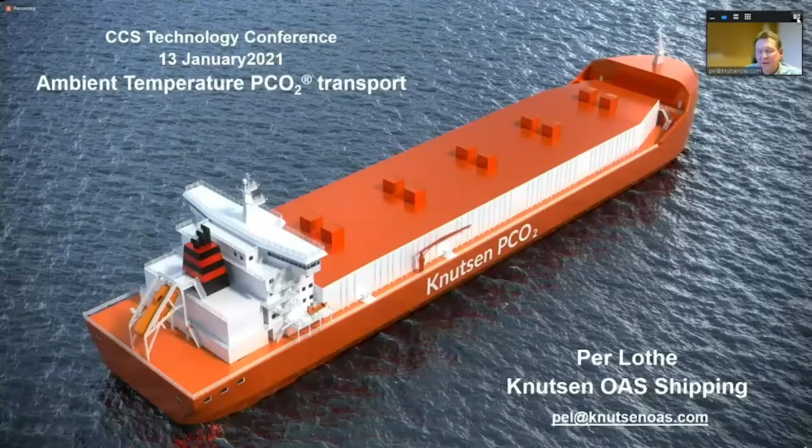So my name is Per Lothe. I'm working for Knutsen OAS Shipping, and we have been working on transport of oil and gas, and now we are also looking very much into the CO2 transport. I think this will be a very interesting thing for the next decades to come. And one of the reasons, I believe, is that the CO2 transport is an emerging market. It's heating up, and a service company like ourselves are consolidating the services, that's for sure.

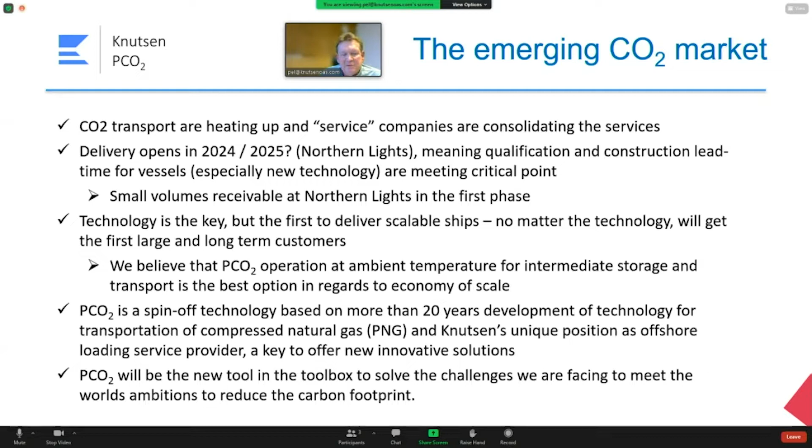And we have the Northern Lights that's just been presented. That is maybe the opening of the market, meaning that qualification and construction lead time for vessels, that's happening now, and we are in a critical point. So small volumes in Northern Lights, I think they have also ambitions to increase the volumes in the future. And this is also one area where we are really looking into. And we also think the technology is the key.

Those first able to deliver scalable ships, no matter technology, will get the first large and long-term customers, because the volumes are quite enormous in the future. And we believe our technology, we call it PCO2, that operates at ambient temperature for intermediate storage and transport, is one of the best options regarding economy of scale. So I'll come back to that.

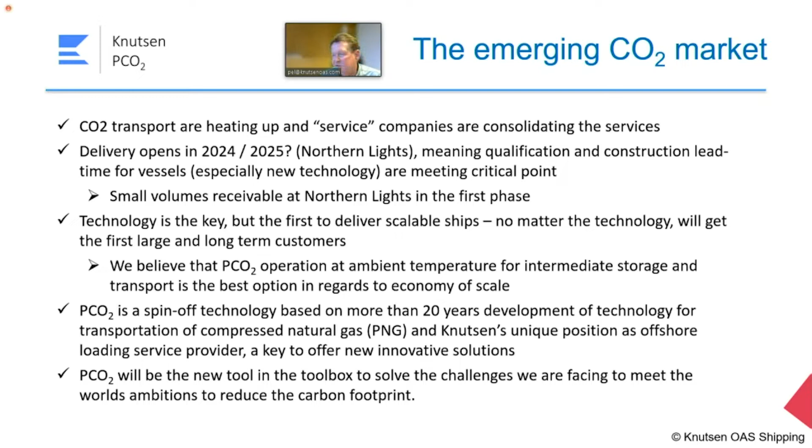This technology we have developed is a spin-off of more than 20 years of work we have done in the company. We started out to transport gas at high pressure, and Knutsen's unique position in offshore loading as a service provider is one of the keys, I think, to a new innovative solution for the future. And this is what we are using now when we are developing this technology. And we also believe that PCO2 can be a new tool in the toolbox to solve challenges we are facing to meet the world's ambitions to reduce the carbon footprint.

And looking at the volumes, that's enormous. Just looking at the EU in 2021, the emission was about 1,500 million tons a year. If we say that the ambition is to reduce it by 50% in 2030, still 750 million tons. And if you're talking about 10%, maybe with CCS, we still are on 75 million tons. And half of that is with shipping. It's quite a big volume.

And as you probably know, there are 3 alternatives to ship CO2. It's the low pressure that was also mentioned by the last speaker. But we have also the medium pressure that is selected for the Northern Lights, and then we have this higher pressure that we are actually promoting, and that's because we would like to transport it above 0 degrees.

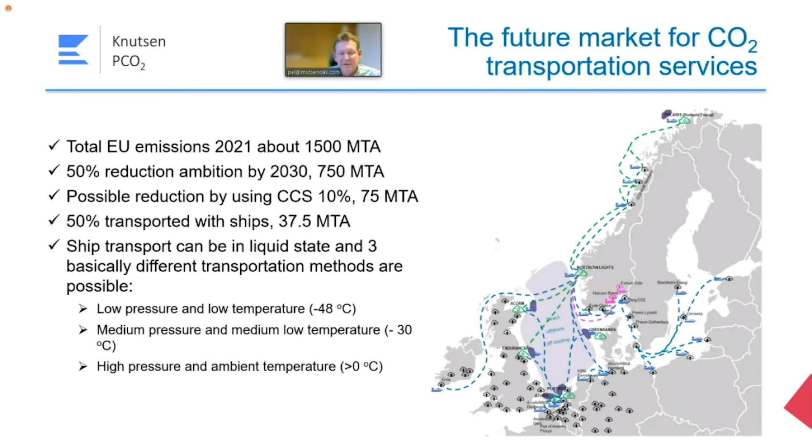This 20-year development is something that we have been working very much on, and we have used this period to actually go into different kinds of transport. So we started with the transport of CNG or gas, and this has developed into other products like CO2 at ambient temperature. And the technology we have is based on well-known technology elements.

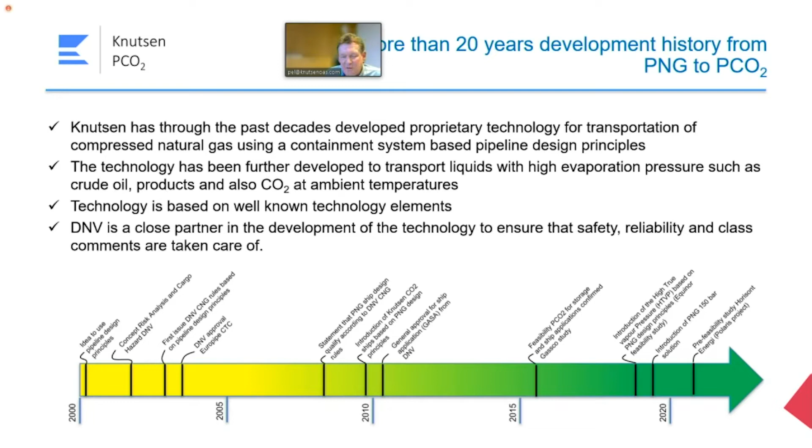The tank system is actually to use pipeline design principles. We believe that's the best known and explored cylindrical design available for storing things in pressure. The cargo tank cylinders, we call it, is where the CO2 is stored, consists of vertical stacked pipe sections, and we have a connection in top and bottom for the liquid and gas handling.

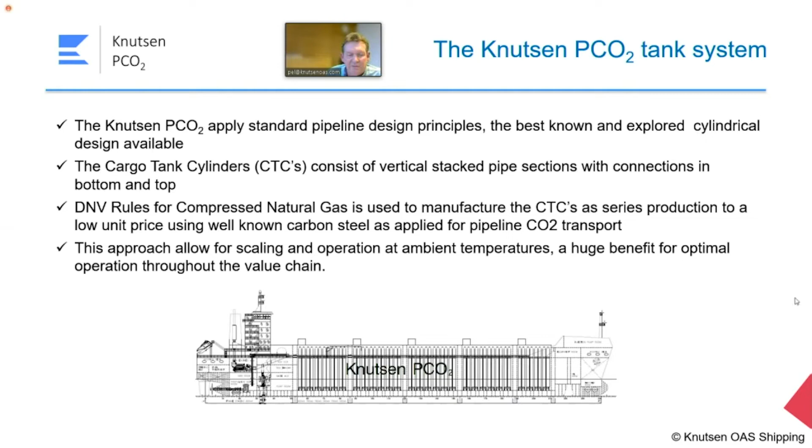We use the DNV rules for compressed natural gas that we are very familiar with. And we also have a good dialogue with the DNV on how we also implement this into a CO2 ship. And the approach allows for scaling operation at ambient temperature, which we believe is a huge benefit for optimal transport operation throughout the value chain. This is how it looked like. The cylinders are stacked into the ship in the cassettes.

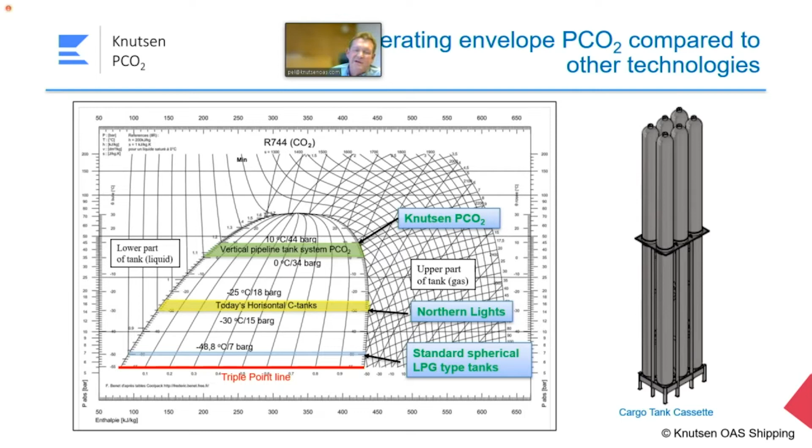This is illustrating where we are compared to other types of transportation, where you have the spherical LPG tanks close to the triple point line. Then we have the Northern Lights, which is about 15, 18 bar. And our system that is between 34 to 44 bar. And this is where we think it's a very interesting alternative, because we are, as we said, offshore operator. And if we are going offshore, this can then be directly injected into a reservoir. I will come back to that as well.

Also for scalability, that's important, because with these pipes, it's the number of pipes and the length, height of pipe we really are talking about. And if you look at this one, the existing CO2 ships are quite small. Northern Lights is maybe the next step. And we believe that in order to be able to transport the big volumes we see in the future, we need to have bigger ships. So we need to get where we have this green PCO2, where we can actually increase the volumes.

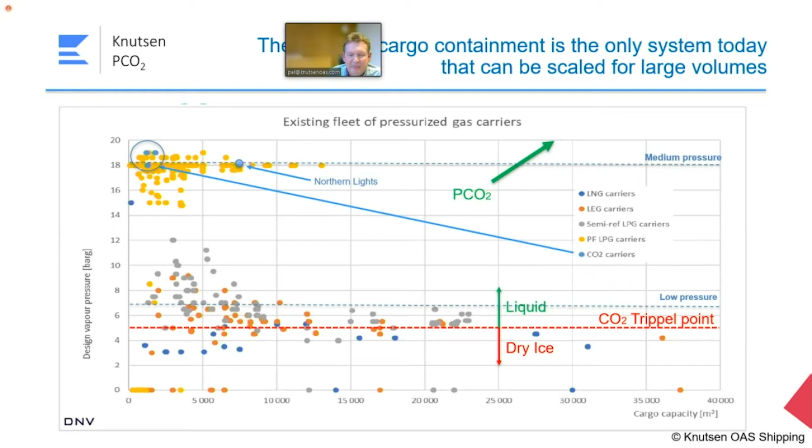If you look at this one, this is how we think about this. Now we are doing this project, a Polaris project, where we are actually considering a 16,000 ton ship at ambient temperature. So I think this is an interesting thing, and we have done design for ships up to 30,000-40,000, by actually increasing the number of cylinders.

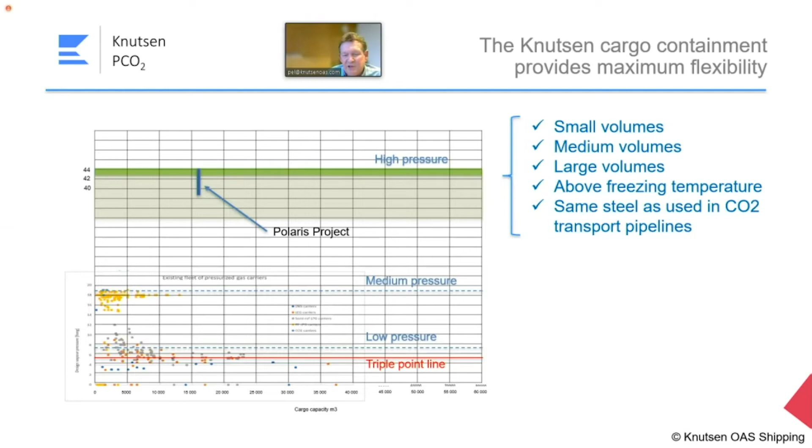We are supported by the world's largest pipeline supplier, EUROPIPE. We have been working with them for at least 20 years now, and they have supported us very much in this process. During the development of the gas system, we have approval of the containment system, and all these approvals are then the basis for what we are now doing on the transport of CO2. So we have done all that is required to qualify this containment system. It's been a lot of work, and I hope we can also use this very interesting technology for CO2 transport.

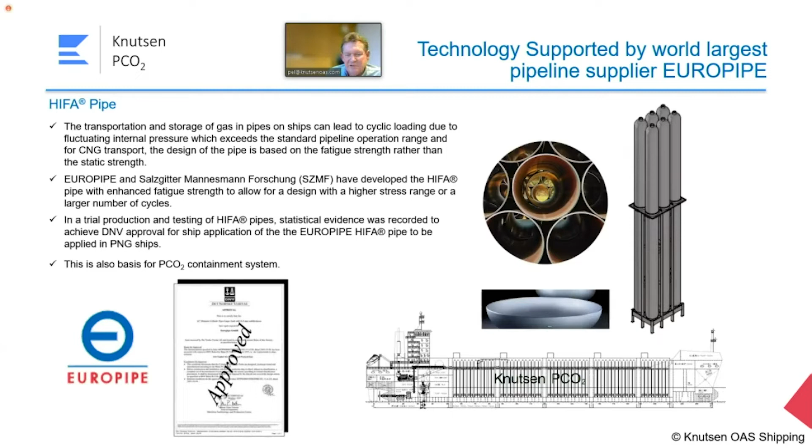This is the Barents Blue Polaris project, where we have been working with Horisont Energy for the last year. Of course, this is a very, very challenging project. They are looking at going directly offshore, injecting it to the reservoir from this plant onshore. We have done design of the ship now in the pre-FEED study, and we are now hopefully going to the next phase of this project. And you see, this is offshore. It's the Barents Sea, so it's quite a challenging environmental area. So this is also important.

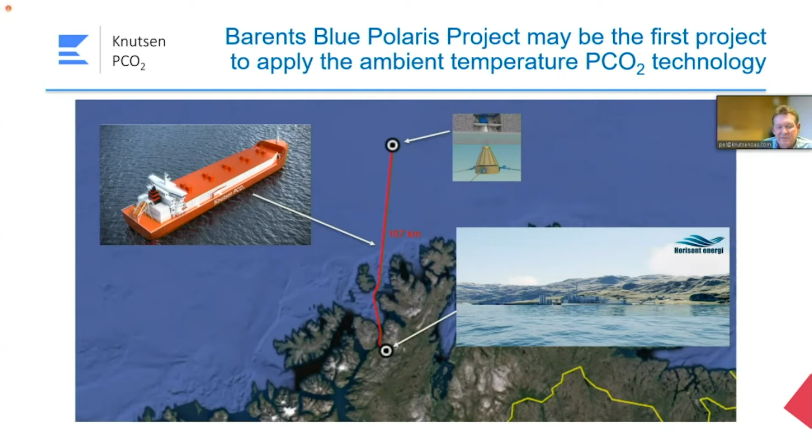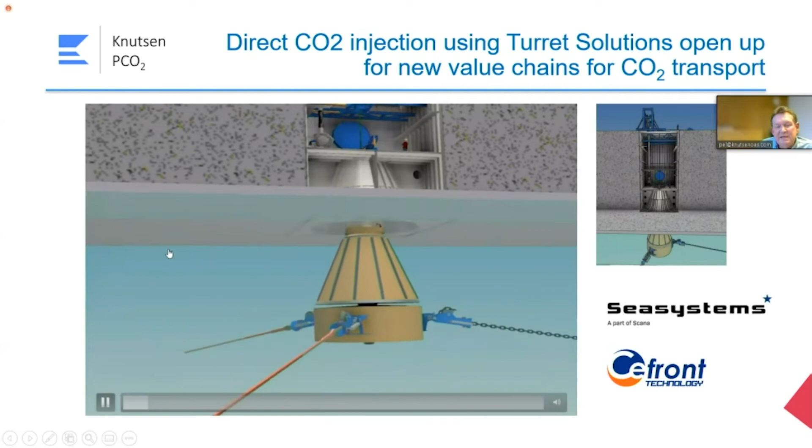With our very long experience with offshore operations, we believe we are very well suited to enter into this kind of project. We have also developed a turret system to be able to moor, because we are not having any platform out there. And we see that this is quite an interesting way of doing it. And then we can stay on field in quite rough sea in order to be able to discharge this directly into the reservoir.

Here we are working together with Seasystems and eFront for this kind of development and the interface with us. And now we are using our offshore loading experience of more than 30 years to actually come up with good solutions for this kind of operation.

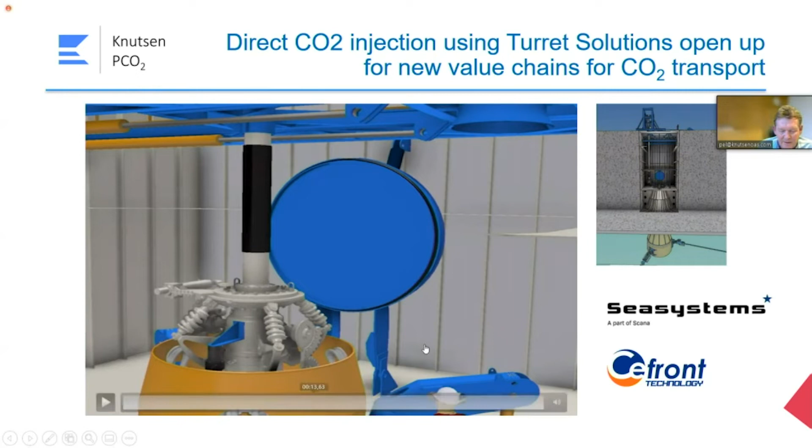What we also see is that with this new tool, we can consider a lot of alternatives, also other alternatives for onshore loading, onshore discharging. Yeah, and this is what we also have. This is the turret solution. We can also load directly from platforms, etc.

And of course, this is mainly because we are operating at ambient temperature. So it's not very cold CO2 we are transferring from the ship to a platform to a buoy, etc. So this is a huge advantage, and this is, we believe, a very good opportunity for our concept.

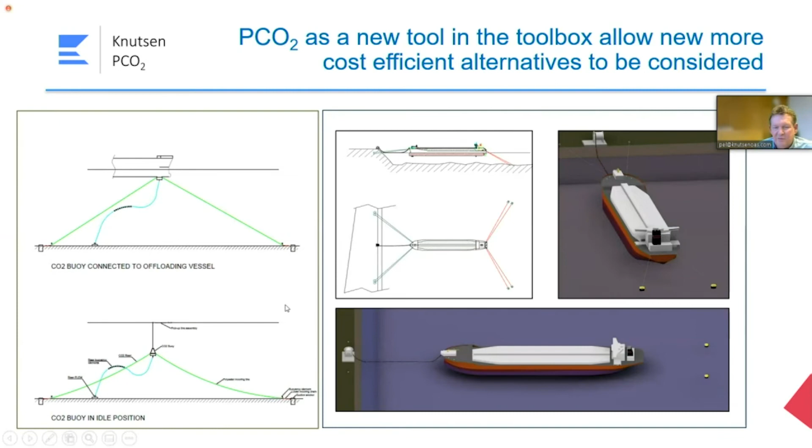We think that the future of CO2 transport will be quite interesting. And we will start now, as we have with these smaller ships and the Northern Lights. That's interesting, and it's the beginning. In the future, we will be able to look at maybe offshore injection hubs where we can have CO2 coming in as shuttle tankers, only the opposite way that we are doing today. And we inject CO2 into the reservoirs.

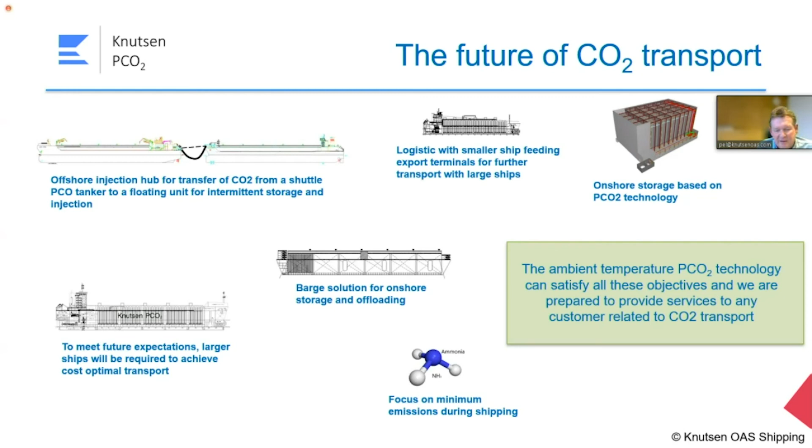And what we'll also say is that it is possible to come with a lower pressure and also load it to higher pressure. This is fully feasible. So maybe having an onshore storage and offloading, we can transfer CO2 and increase the pressure on this barge, and then we can maybe go directly offshore. So there are so many alternatives, and having a new tool in the toolbox for CO2 transport, we believe, is very interesting for the industry. I think that was what I was thinking to say about this now.